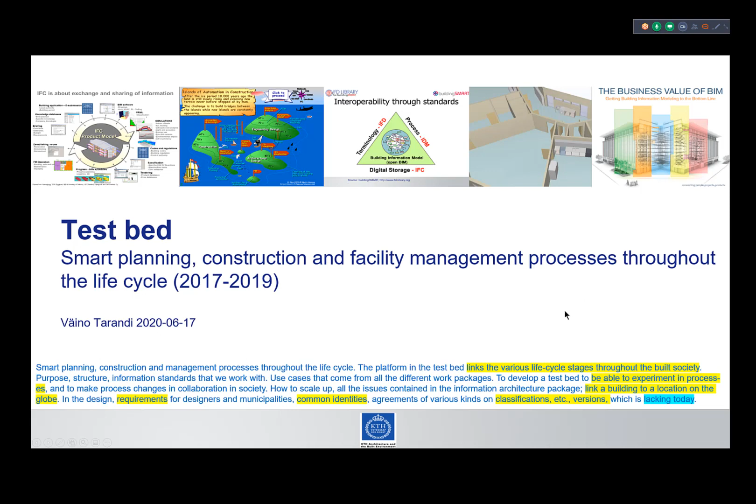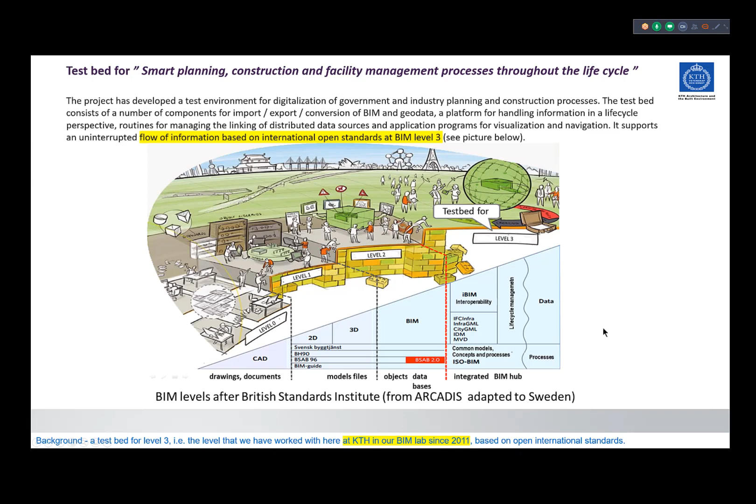That platform links various life cycle stages throughout the built society, and it supports level 3 of this BIM wedge, as you call it. At KTH, I started this in the BIM lab already in 2011 with some other collaboration hubs. The testbed's core values include standard interfaces, REST APIs to access this, and also handling heterogeneous environments, mapping different data models to a common neutral structure according to PLCS, and support for a common data environment.

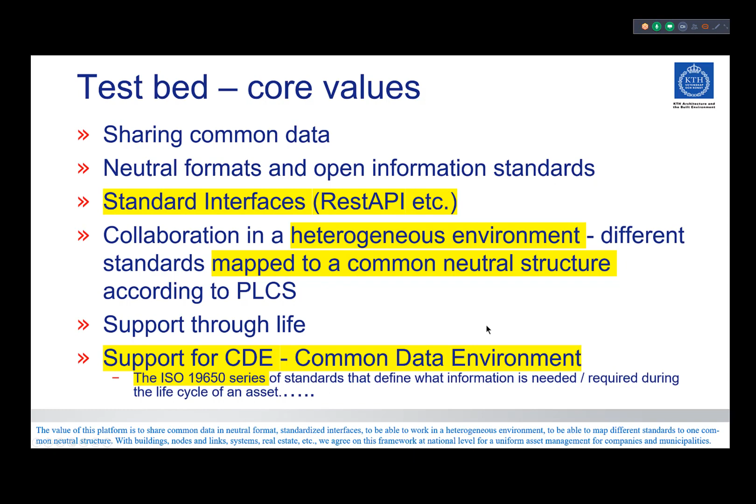And it supports an uninterrupted information flow. For these digital twins and circular designs, there is a requirement for unique identities, classification, versions, and associations between individuals and types, etc.

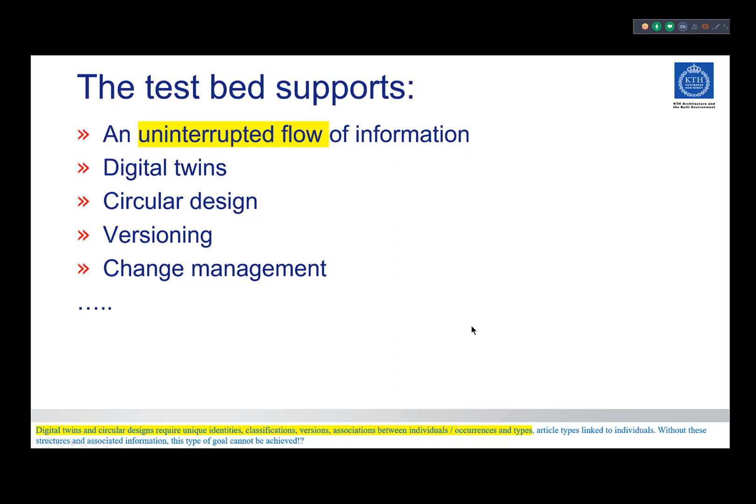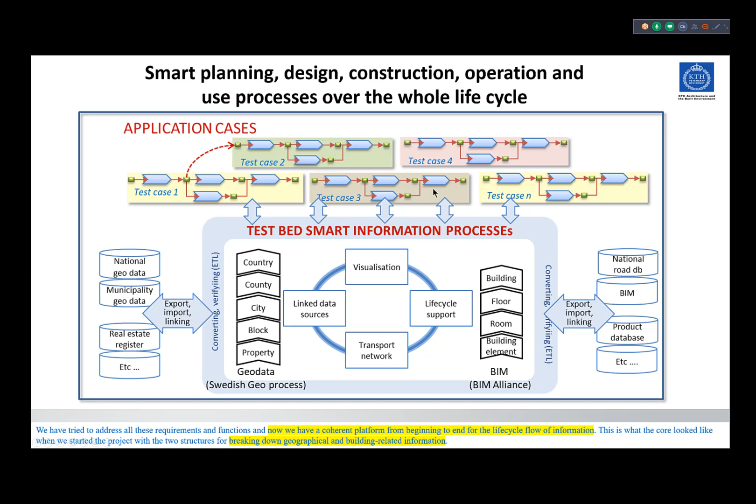So in the testbed, we merge geodata and BIM data with access to external databases and links there. We have done some test cases for these imports and exports. We have tested it for both the planning process for municipalities and industry. We have the construction process and the planning process, having the testbed sort of in between. The concepts are based on existing work practices here in Sweden, but the information flows have been extended and changed to really take the information the whole way and have the flow. Our test cases have just covered parts of these.

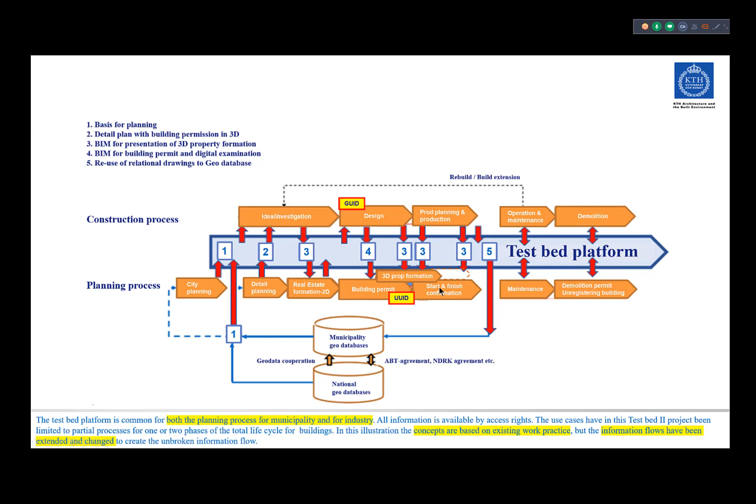In the next project, starting this autumn, Testbed 3, we will try to have asset management, etc., the whole way and look at the process. We have issues with these global unique IDs and UUIDs on the municipality side, for example.

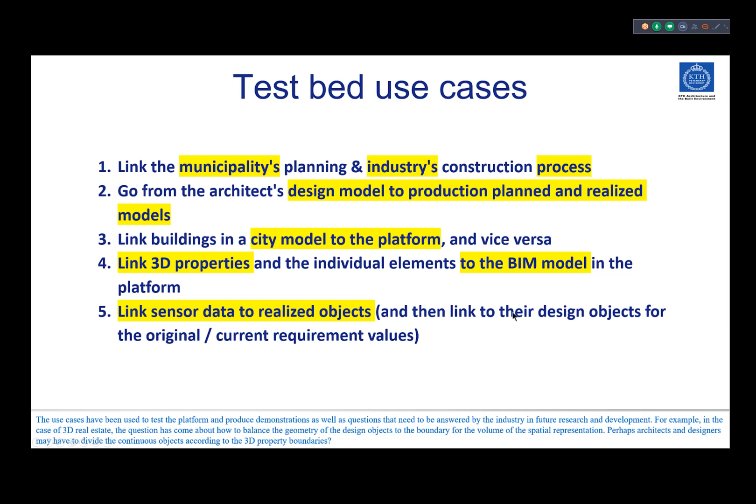And the use cases, we link some municipality planning and industry construction process. We have the architect's design model to production planned and realized models. We link buildings in a city model to the platform and vice versa. We have these 3D properties and the individual elements in the BIM models linked. And we link sensor data to the realized objects and then link to their design objects for the requirement values.

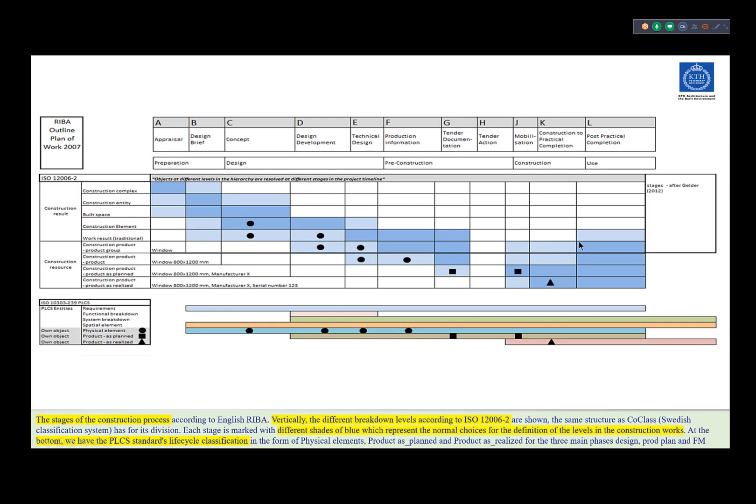We are looking at the different phases of the processes, like the Royal Institute of British Architects. Here we follow that as an example, and we have ISO 12006-2 with the construction results and construction resources, looking at how you break it down into these construction products and so on. With these blue shades, we see the preferred phase and the level of detail in the construction structure where decisions are taken. Down here we have the PLCS entities: requirements, spatial elements, physical elements as planned and as realized. These icons are decided in the concept phases and are versioned. Then comes the as-planned in the tendering and product planning, and then the as-realized down here at handover for the operation.

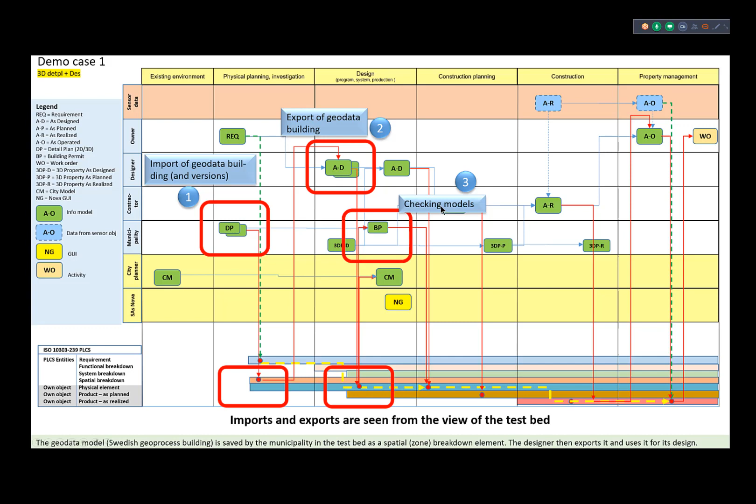And the use cases: 3D detail plan to design. Here we import the geodata building from the municipality into the platform and export it to the designer to do their BIM model, then check the models for building permits, for example. We have the design-plan-realized use case for the architect. Here the design is imported, the as-planned is imported, and the as-realized is imported, and they have their different representations in the different phases.

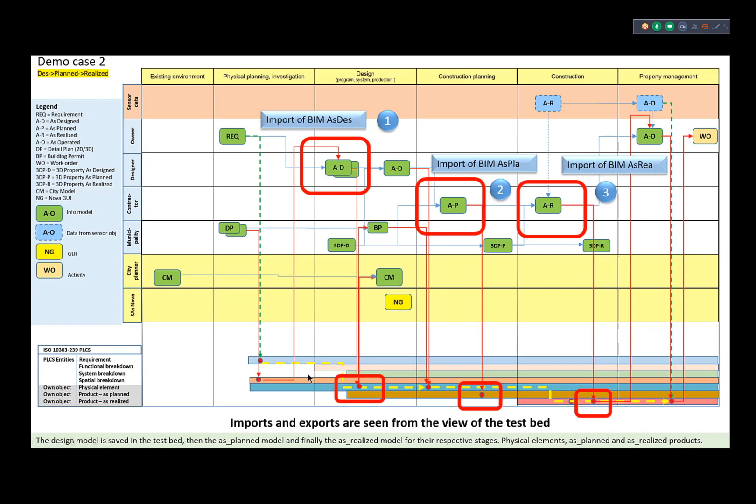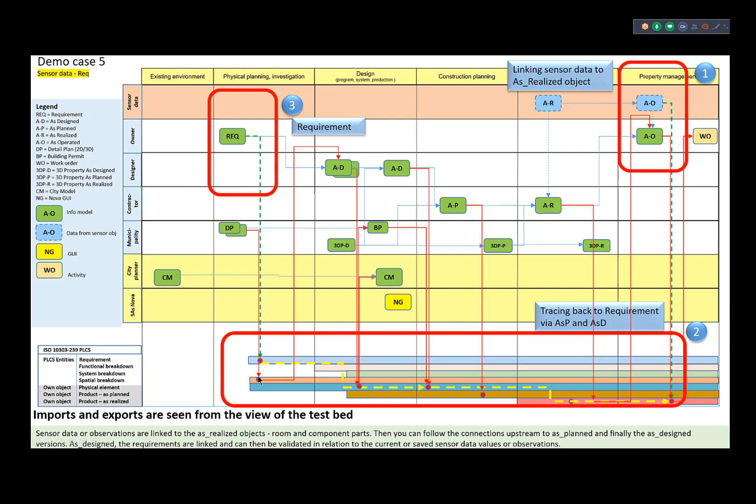Then sensor data: we link the sensor data and the sensors to the different objects in realized and operation, and link that data, tracing it back to the requirements via the as-planned and as-designed objects, to the requirements that have been linked in the beginning.

The topology for the use case is breaking down the country into counties, municipalities, parts of city blocks, and real properties, putting some abstract buildings there as placeholders for the geodata and the BIM data. We have networks, and we have also 3D properties that are perhaps linked to the municipality, we don't know. We have facilities and facility parts coming from Building Smart now. In these we can have roads and railroads, bridges, and so on, as designed, as planned, and as realized.

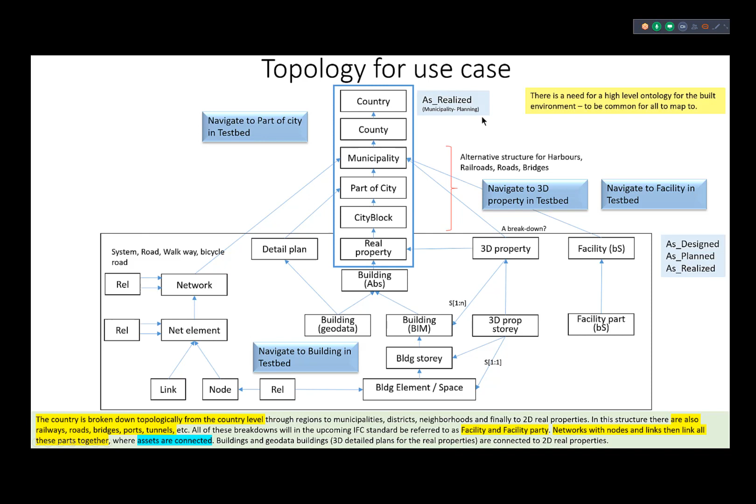And this structure is as realized in the municipality and the planning phase. The structure of PLCS here shows the basic object types with requirements in the functional breakdown, system breakdown, zone breakdown, physical elements, the parts, product as realized.

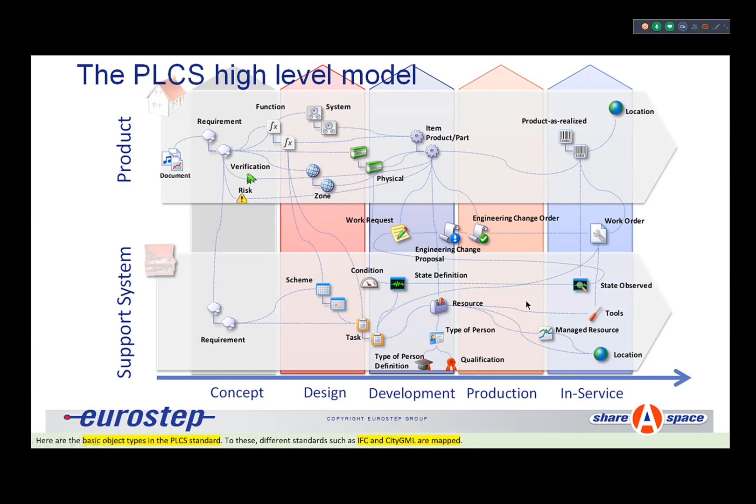We have the requirements, the tasks for maintenance and operation, and we have state definitions, state observed, all these things - classical PLM. Here we map IFC, CityGML, and InfraGML to this. Here's another view where we can see the product, the subclasses, requirements, parts, breakdown systems, interfaces, and slots.

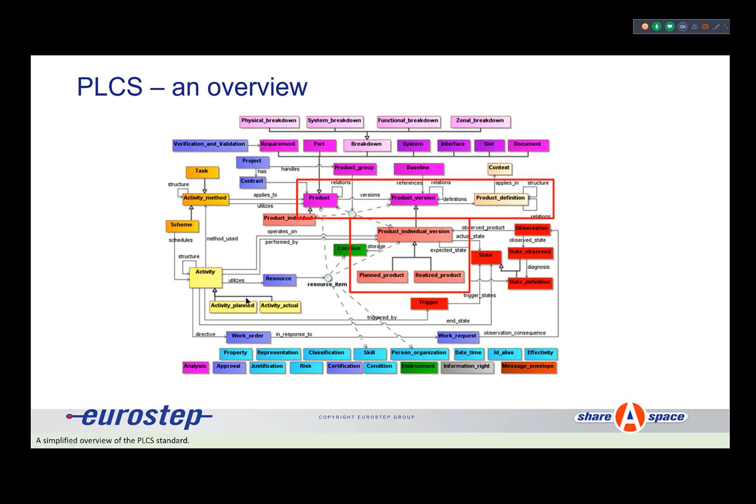They are all products. They have versions, and they have views, product definitions. You link observations to the individuals, and you have work requests and activities to work with these. The main structure in PLM PLCS are these: we have product as the generic entity, that is subclassed, as I said. It has versions, and it has view definitions.

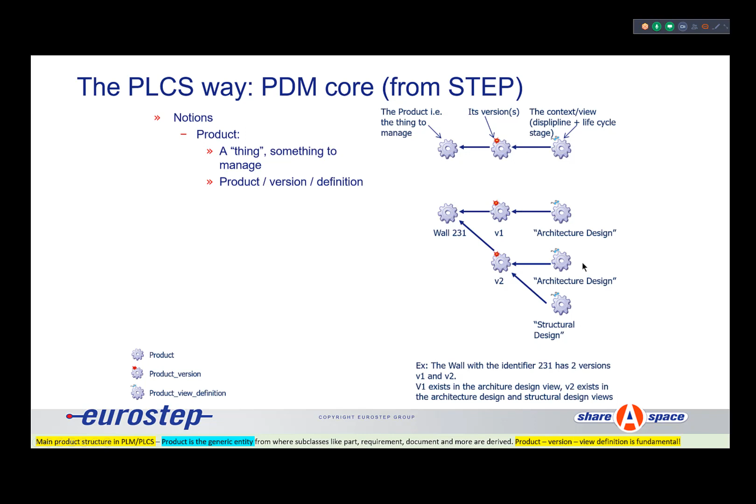Here is an instantiation on the wall, version 1, version 2, architect's view, and also the structural view on the same version 2 here. We also have important structure elements, these relationships on the product level, on the version level, and the view level.

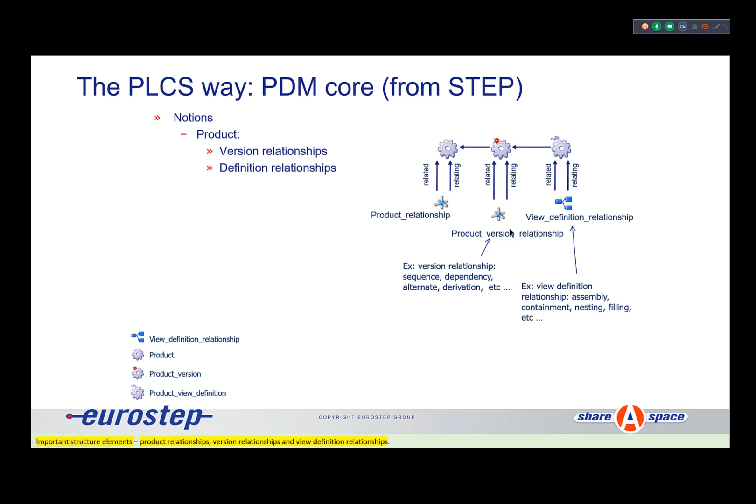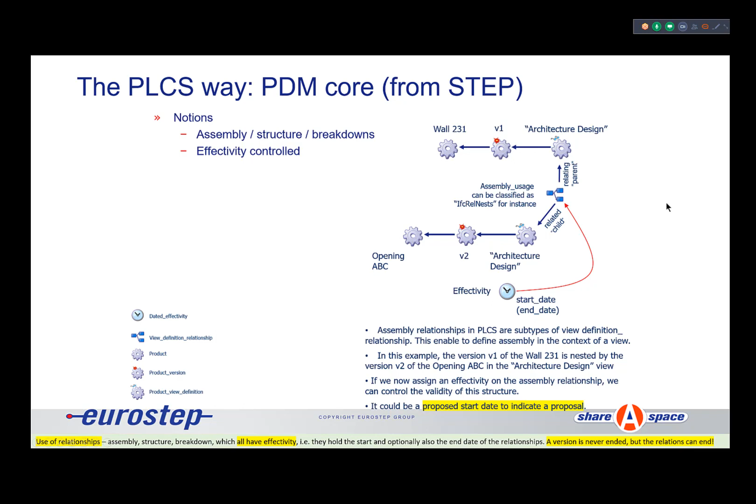These relationships have the parent to child relation, and the effectivity with the start date and end date if they end and there are new versions coming. Proposed start dates can indicate a proposal in the future. The version is never ended, but the relations can be ended. So when we navigate, it's on these relations, we look for them in time.

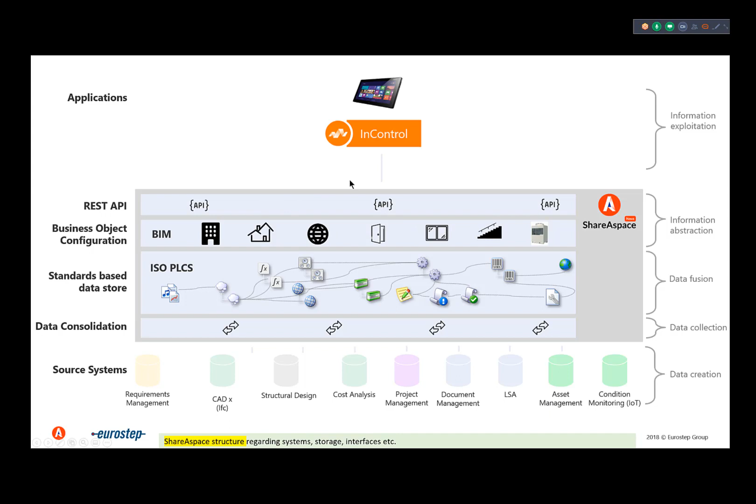In the platform based on ShareAspace from Eurostep, we have all the source systems and import to consolidation of data according to PLCS standard in the data store. We have business objects for this platform now with BIM entities, and we have REST API to go to the different applications, importing, exporting here.

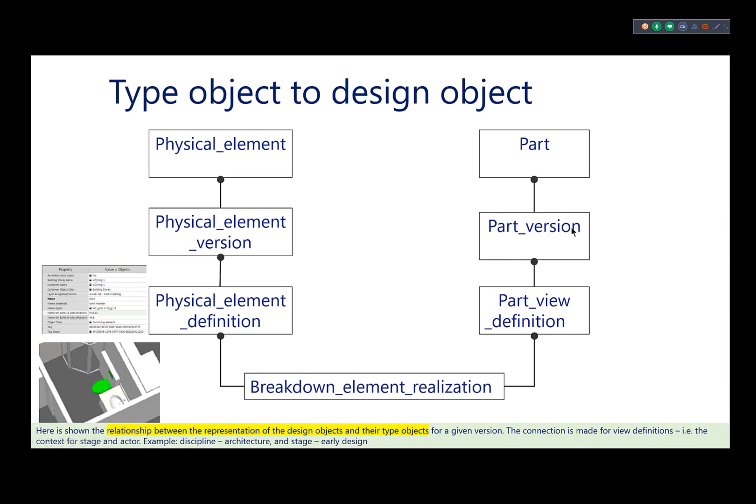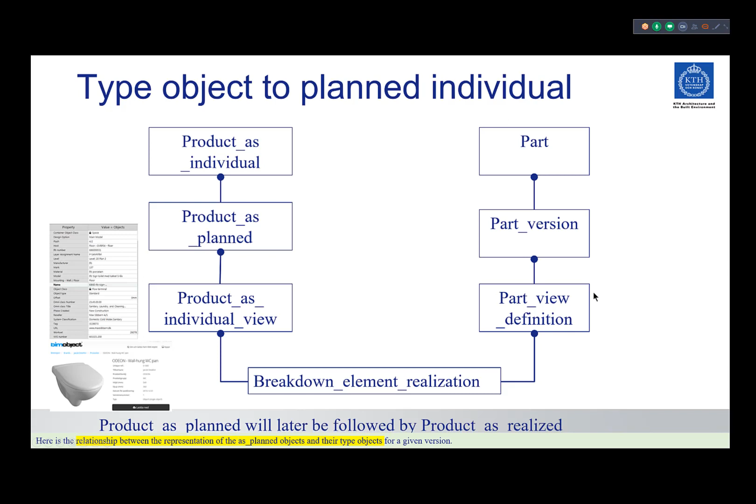Manipulating the data, we have a relationship between the representation of the design, and we have the types, also parts with versions, so the types are versions for the design elements, and we have the planned elements also having types and versions. We link the design elements to the as-planned elements, and we can have the relationship chain from the physical design elements to the product as planned and the product as realized, where we can link the serial numbers.

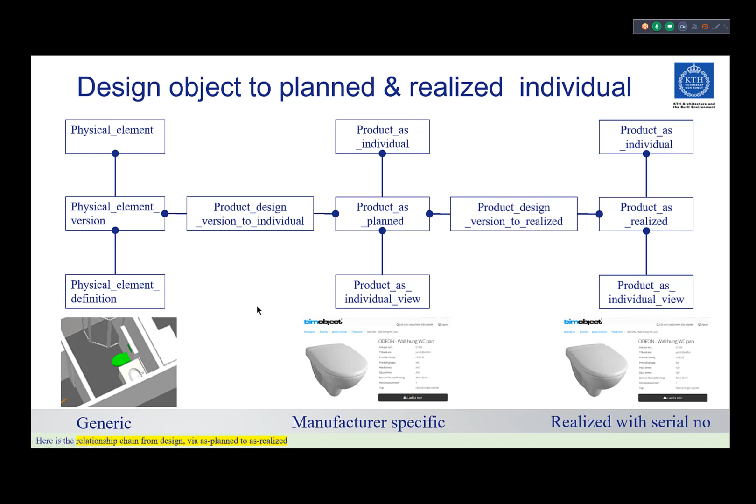Here we have the manufacturer specific products and types, and here we have the generic ones that should also be in different BIM object libraries.

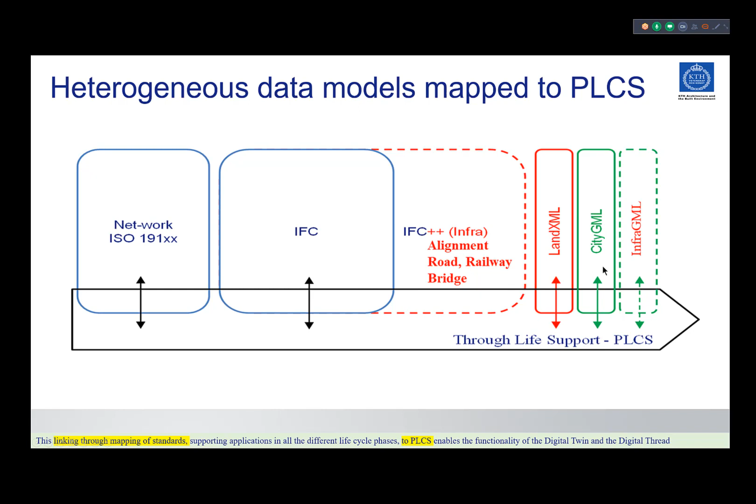We map the different heterogeneous data models to PLCS. We test with network models, IFC infra, done some CityGML or the Swedish representation of it. I hope to look at InfraGML. We have the PLCS concepts in the test bed.

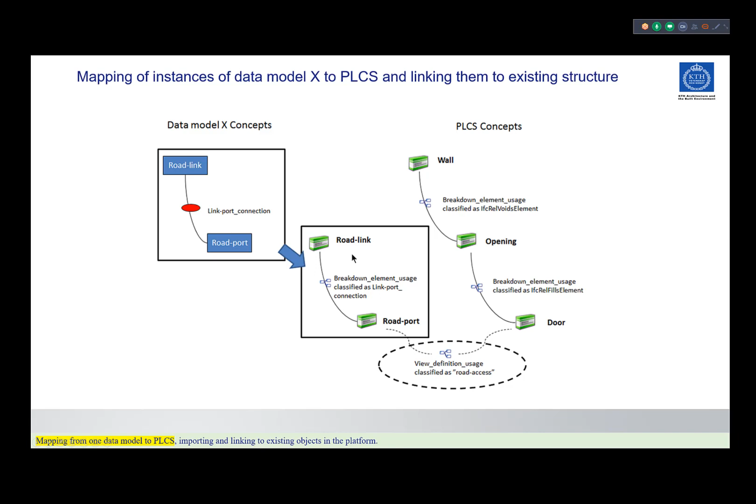The design elements here, walls, openings and doors, the relationships are classified as IFC relation. When we import from some data model with road links and road ports, we map them to these design elements and classify them as road link and road port, and have the relationship classified as something like link port connection. Then we connect the view definition usage and classify it as a road access, for example, from a garage door to an entry to a road going out to the big road.

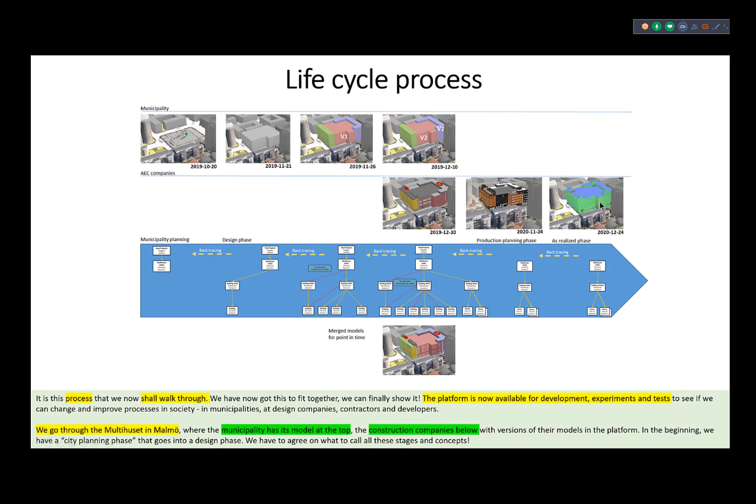Here comes the geo data model, the sort of 3D detailed plan for this property. Then there are parts divided with version 1, and some of them will get version 2 later on. And the industry process with BIM models for cost estimation and building permits, and then production planning, and for operation facility management, the realized one.

If we go down here, we can see that we break down the municipality planning with an abstract placeholder for the building on the plot, and then we have the design phase, and we have tracing back from the different to the previous phases. Here we have different versions. I will come back to that.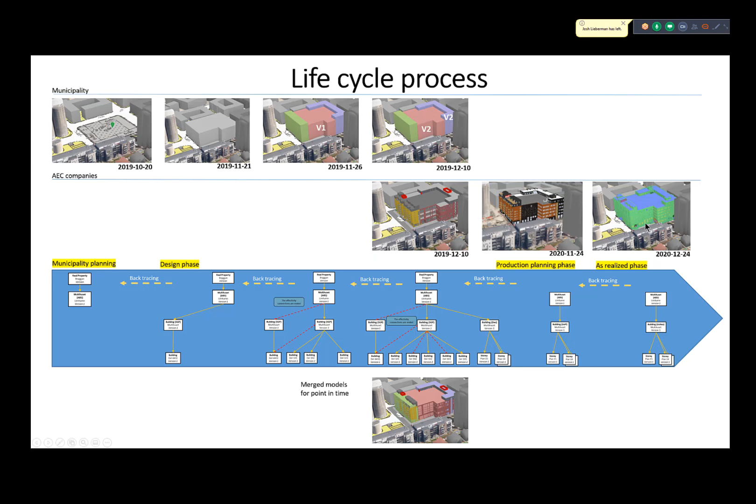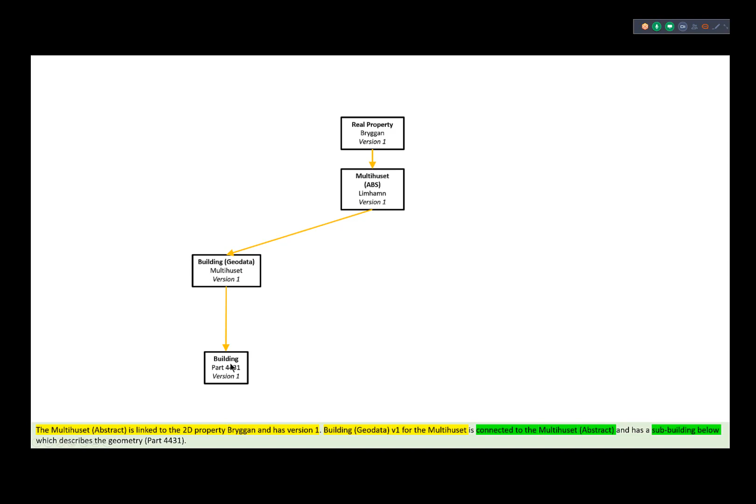Here we have new versions of the parts, and then we add the BIM model under this abstract placeholder building on the property, because we talk about the same building both for the BIM and the geodata representation. Then we can merge them and look at them together in the city model. Here we have the BIM for the planning, and here is the BIM model for the as-realized phase. So we have the first version of the geodata building with some sub-buildings with the geometry.

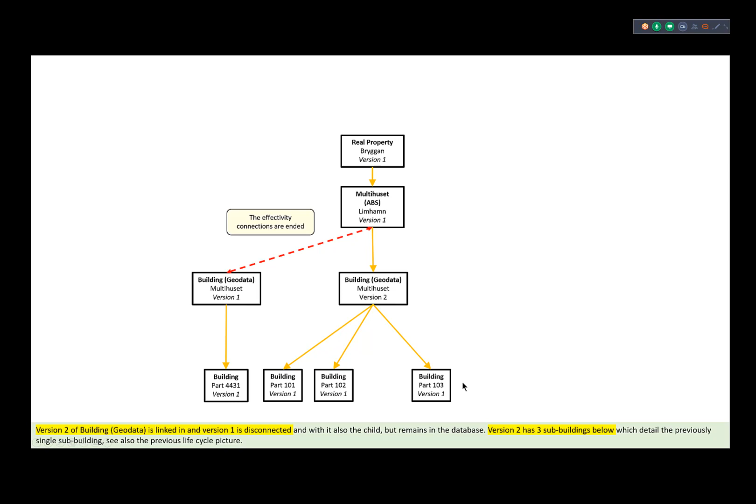Effectivity is ended for this, and there's a new version with these 3 different sub-buildings, and coming new versions on them, and the older ones are sort of ended the effectivity.

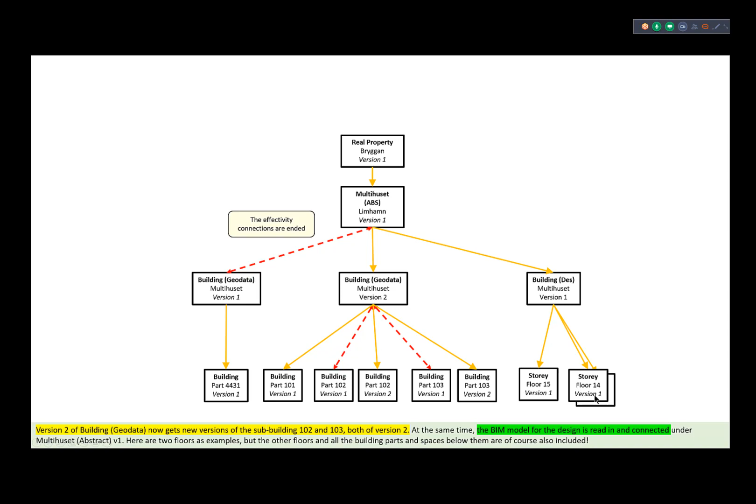At the same time we add the building in the BIM model with here just 2 stories shown, floor 15, 14, and there are then spaces and building elements under it.

Then comes the as-planned BIM model with also stories, and then you have the back tracing with identities on the different levels to be able to see what was coming before.

The 3D property in the as-planned phase have some abstract stories to be able to link to spaces and building elements in different buildings on different real estates.

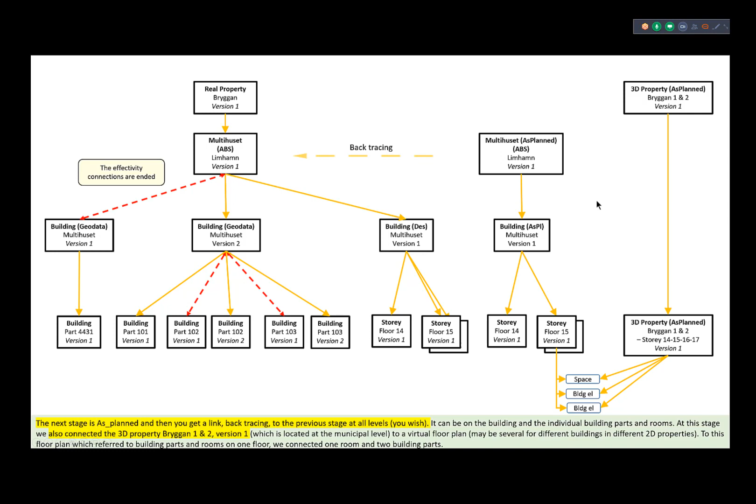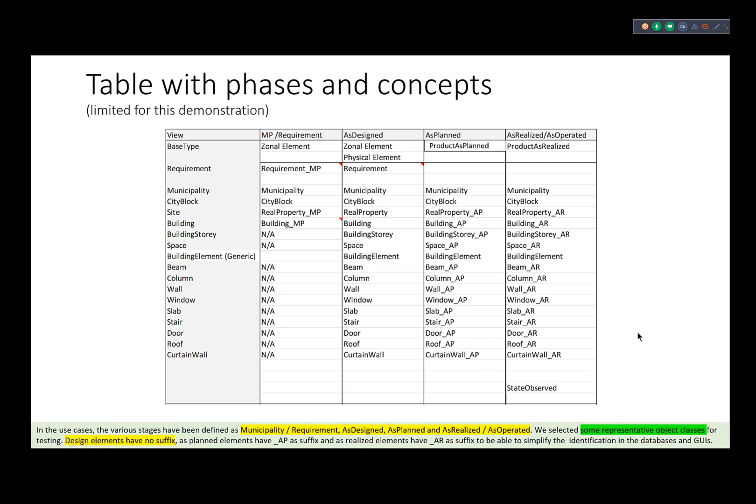In this table we have the municipality requirements, the as-designed elements, as-planned where we have the suffix AP, and as-realized with the suffix AR, to be able to differentiate them in the GUIs and other files, etc., where we see them. And now the demonstration part.

We have the municipality here. We look at the queries. We ask for municipalities. We find Malmö here. Here are the results of the queries, and here are the details of these selected results.

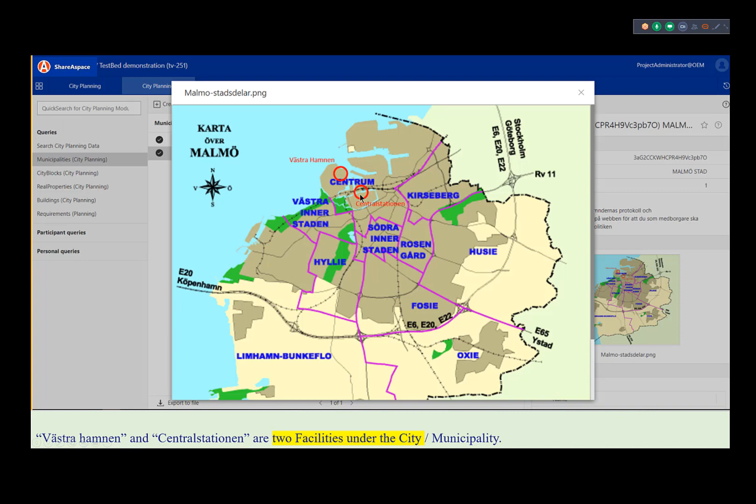And we have the Malmö here, just a map to present it, and we have these 2 facilities, West Harbor and Central Station, and break down the different districts.

Here is Limhamn Bunkeflo, one part here, and there is one 3D property and 3 real estates. The 3D properties could be shown in 2 different places, but it's the same, only one instance in the model.

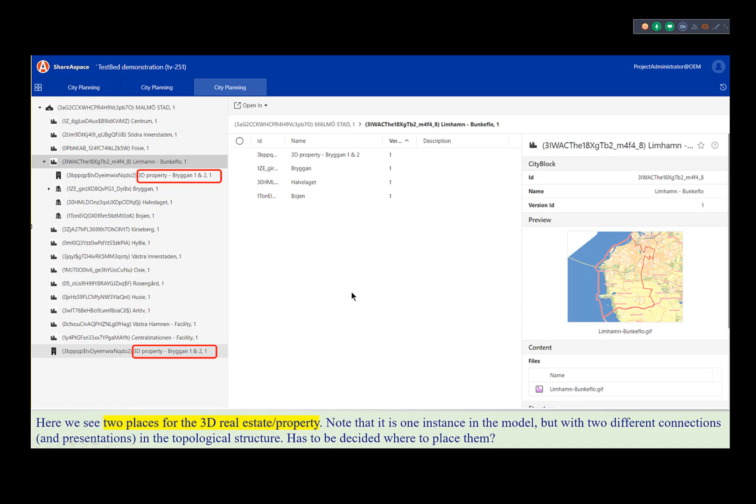From this Bryggan 1 real property to this multi-house, we navigate down there, and then from that coordinate we go out in the city model from Bentley Open City Planner

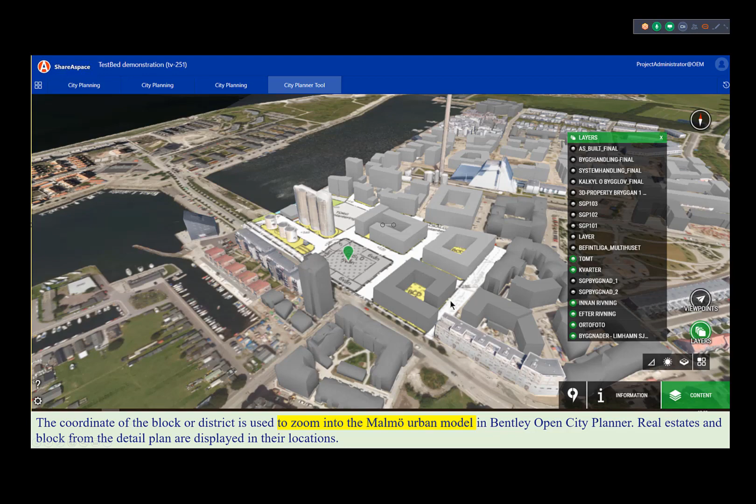and see this real estate, and can then link from the identity of that into the platform again and come up to this real property with this abstract house here as a child, and we have the abstract building here,

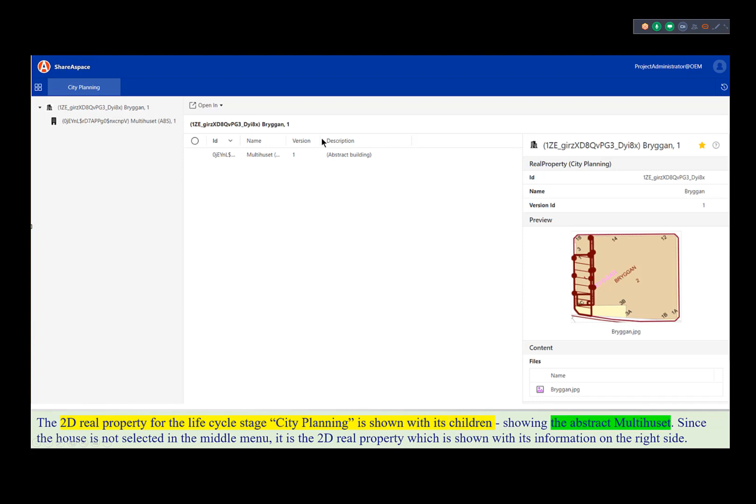and this sort of date is now changed. So we go to the design stage and the building is selected. We see all these buildings and the versions, version 1 and 2 of some of them, all created, and their versions are displayed. We set the date,

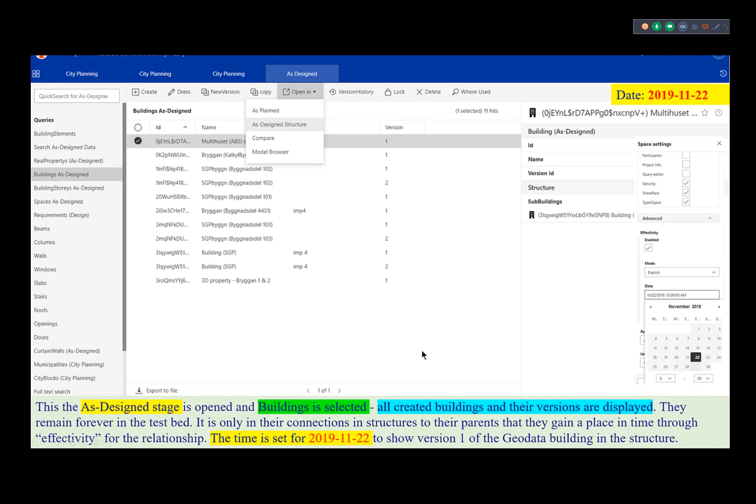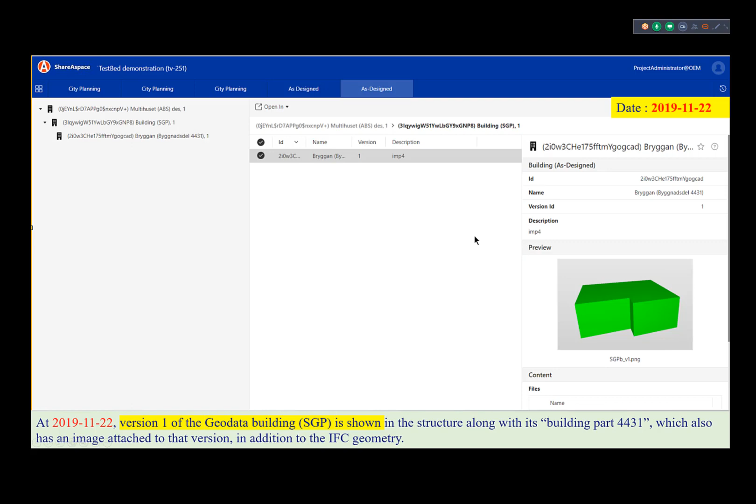and then we review this again, and we find that this abstract building has one geodata building, Swedish geoprocess building here, version 1, and it has a sub building part 4431 as we saw before, and here's the properties of that, the IFC model, and we export that IFC file with properties into Solibri, for example, to look at the building permit status and some dates and so on in this.

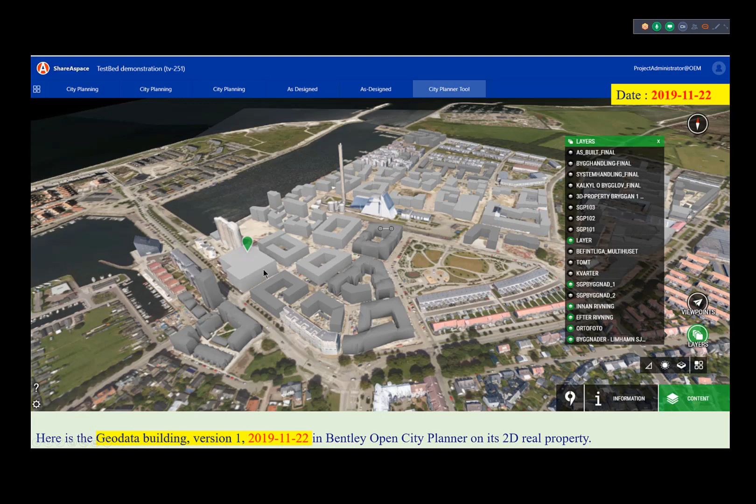Back to the Open City Planner, and now we have exported this geodata building, we go back here and set the new date and select the multi-house again, this abstract building, and see now that it's version 2 on the geoprocess building, and it has the 3 subparts with version 1.

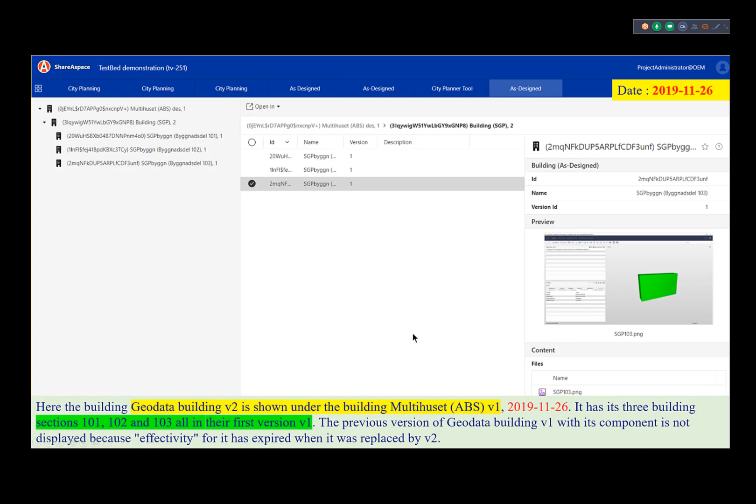We move in date again and look at them, and now we have version 2 on 2 of them, and we can check one of them having version 2 on the geometry and properties as one view taken out in Solibri Model Checker.

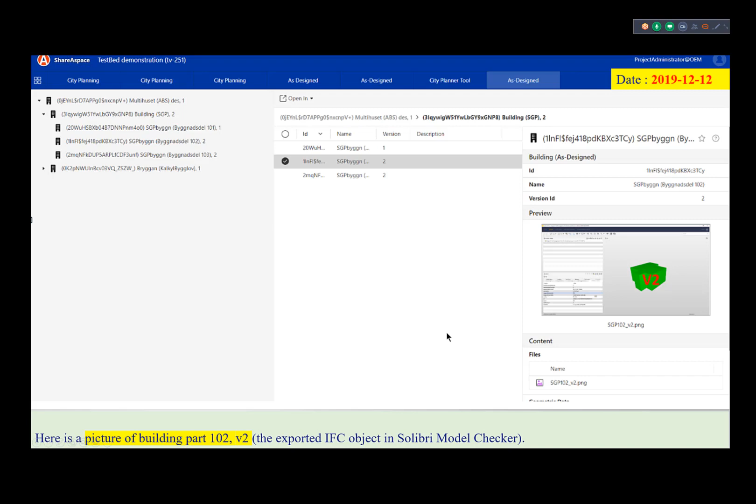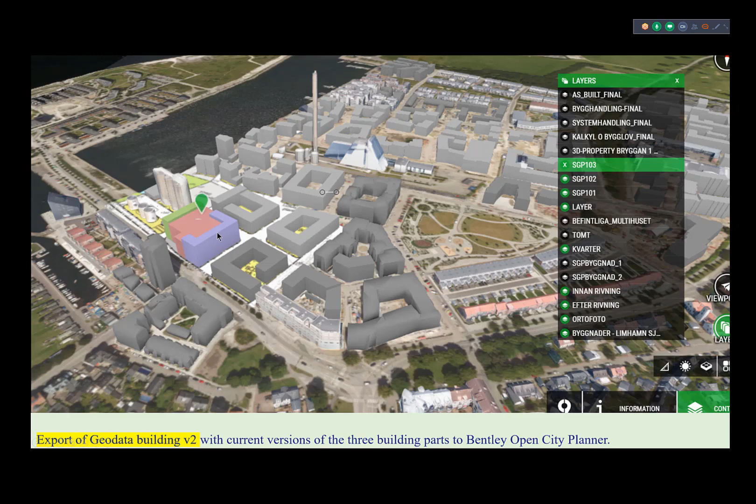Go back and look at it, export it with KMZ files, put it in the right coordinate in City Planner, and we can then see that the BIM model for cost estimation building permit on this Bryggan, it's here.

It's also under this multi-house, the abstract one, with the geodata model version 2, and we can combine them and see that there are some parts of the BIM model outside the geodata model.

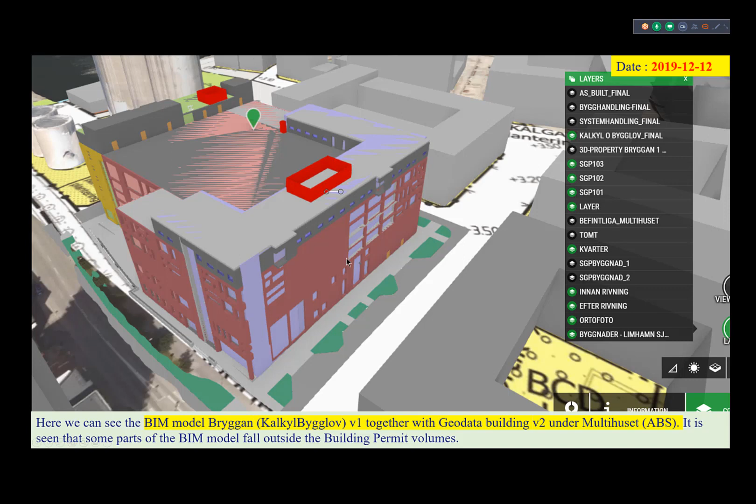We go forward to the production phase and open here floor 16, and we can see that there is a link tracing back to the design phase from this plan phase,

and we open this floor 15 and see spaces and building elements. Select one, room 106, and we can see that is tracing back to the design version, and we can see that there is a requirement linked to that when we go to the design version, and that's a temperature requirement, and that is just a very simple example.

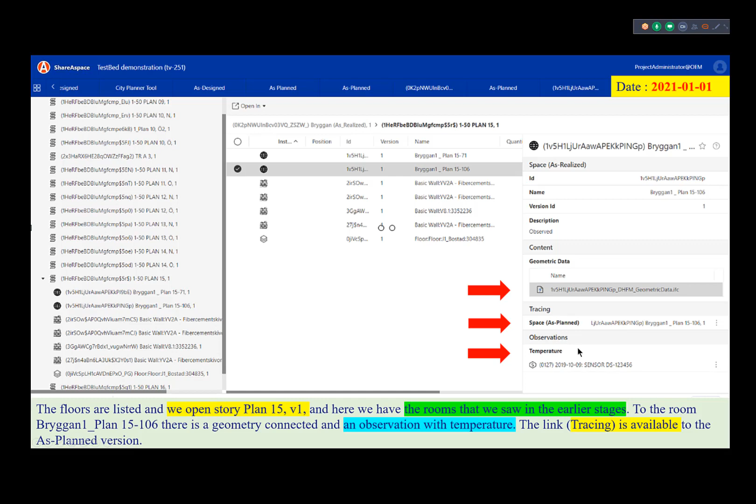We go to the life cycle stage as realized later on here, and we can then see for the same story 15 on the same room, that it has geometry, it has a tracing to the as-planned, the previous phase, and it has also an observation temperature available here.

And that observation is a vector coming from an IoT device like a temperature sensor or an observation. And the Testbed 3, starting in August, it will integrate sensors and other IoT components in the information model. It will have 4 test cases with asset management, sensors through the process, smart city and requirement management.

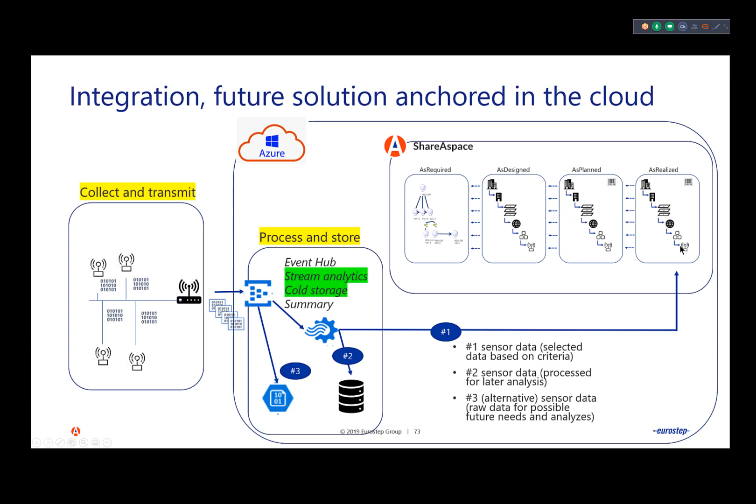I will be the project leader. It will be 3 years. And we will have this addition on the sensor side. We collect and transmit, process and store, and keep control over these analyses and link the results to different phases and to the sensors linked in the model, serving some of the systems or spaces, etc. Thank you very much.